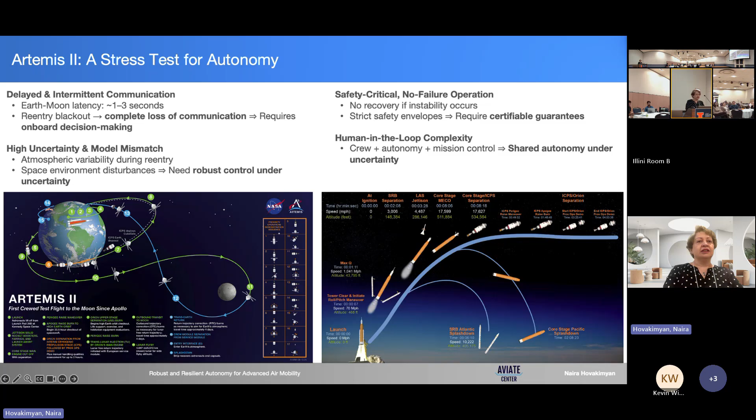The keywords that we've captured here reflect what was emphasized throughout the 10 days: the unforgiving nature of space engineering. Equally unforgiving is commercial aviation and today's advanced air mobility industry, which deals with human lives.

I decided to do a brief historical overview. When I came to this country 28 years ago, the aerospace industry was presented through these big vehicles at Georgia Tech. I came with a PhD in math and had to work on stability of these flight control systems. Everything was big, huge, humongous. As I worked 28 years in this country, everything got kind of miniaturized, small scale, autonomous, human-centric.

These developments were enabled by the data explosion that came with the hardware development of making CPUs and GPUs cheap and available. LLMs and VLAs became a common marketplace. Consumer markets like parcel delivery, emergency response, and agriculture also became part of the problems for the aerospace industry.

Commercial aviation, over 100 years, by enforcing zero tolerance to accidents, has achieved safety and public trust, flying 4.5 billion passengers per year.

The same cannot yet be claimed for the low altitude space, where advanced air mobility developments are happening. Just last year near DC airport, a passenger airplane crashed into a military helicopter - or better to say, the military helicopter crashed into the passenger airplane - causing catastrophic failure and the death of many passengers. So the low altitude space remains largely vulnerable to different uncertainties and unpredictable circumstances.

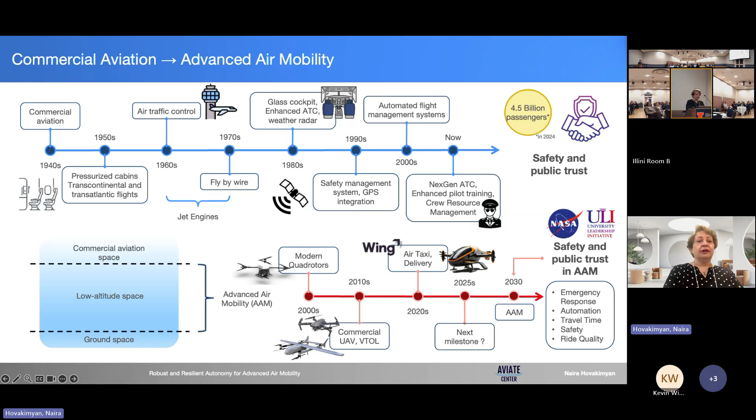The problems that appear here have a lot to do with autonomy, optimization, deconfliction, path planning, mission management, and many others. In the low altitude space, we're thinking about emergency response, healthcare, optimizing travel time, cargo delivery, and many others.

The technology that can tackle this, what we're trying to solve, should deal with scale, complexity, and also safety. For that, we need autonomy with assured safety.

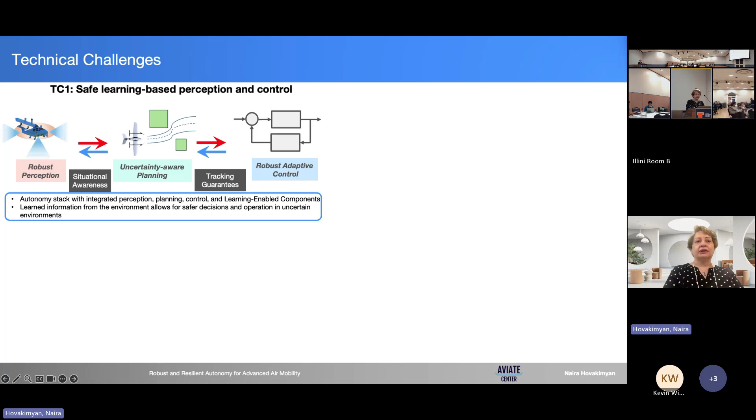The technical challenges formulated through this ULI program are four. The first is safe learning-based perception and control, where we're trying to integrate different learning-enabled components into L1 adaptive control architecture, or other architectures expanded through collaborations, like the simplex architecture we developed with Lui Sha for integration of learning-enabled components.

We have fast data-driven and code-level verification that Mitra is leading. We have runtime fault diagnosis and reachability analysis being led by North Carolina A&T University, which is an R2 university - they were trusted with a major technical challenge. And we have testing, evaluation, and integration toward technology transfer, under which we developed all the flight tests that we had.

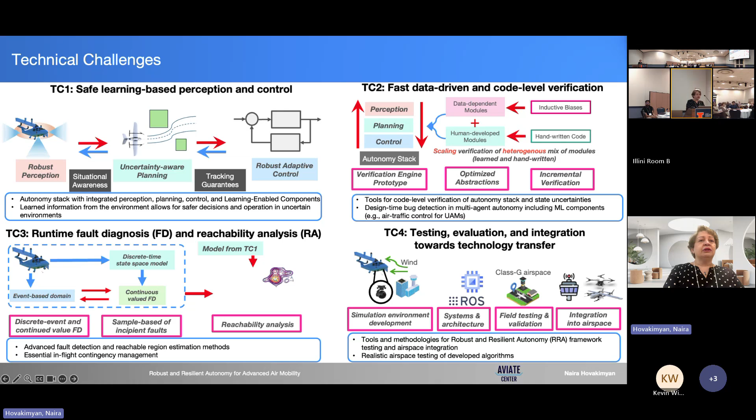This University Leadership Initiative culminated in a major Autonomy Fest flight demonstration at University of Nevada, Reno last year, led by Christos Papachristos, who worked closely with Evangelos Theodorou from Georgia Tech and Sierra Nevada Corporation. Within two days, they demonstrated takeoff and landing on water, and vision-based landing of small UAVs.

They did covariance steering, like obstacle avoidance up in the air, where you see the machine learning-enabled path planning coming from Georgia Tech, flying on the vehicles of University of Nevada, Reno. Christos will give a big overview of this.

Another major culmination of this University Leadership Initiative was the flight test of Lockheed Martin on the Vista platform, at the heart of which is the L1 adaptive controller. This is a historical chart of the L1 adaptive controller that we started to develop in 2004-05.

The objective was to solve the transient performance issues of conventional adaptive controllers, which were sensitive to delays and disturbances and could result in loss of robustness. With the decoupling of the control and estimation loop, the L1 adaptive controller solved the transient problem.

Through a NASA program with the flight test of a subscale commercial jet, Boeing 757 at 5.5%, we commercialized it across a number of industries. We were able to flight test on a Learjet and F-16 at Edwards Air Force Base. Jessica is here - she was our flight test engineer. And finally, Lockheed Martin put it on Vista, claiming TRL-6.

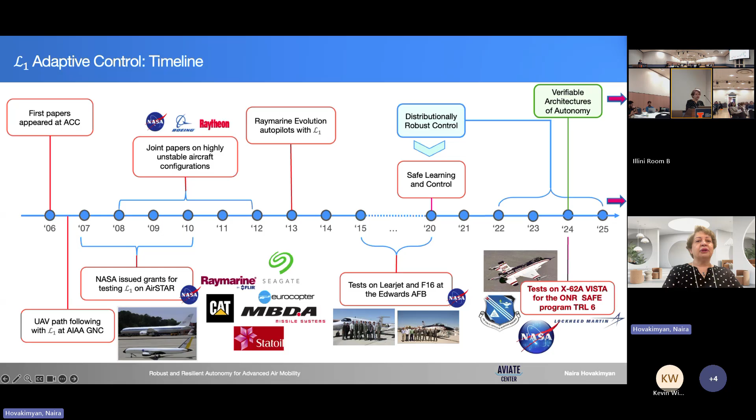The paper summarizes the flight test overview and shows the architecture that was flown.

With that, I would like to give an overview of today's presentations. We will move from TC1, which has safe learning-based perception and control. Lui Sha will present the perception simplex, where we have extensions already to accommodate perception uncertainties in the simplex architecture. They will give a good overview.

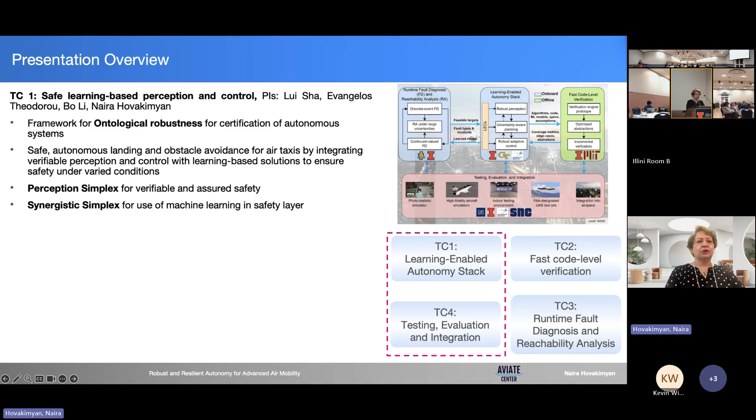We will give an overview of what we call ontological robustness, a language of communication between machine learning enabled components and also the L1 adaptive controller. Why do I emphasize it like a language of communication? Because these vision-based sensors operate with learning enabled components that have stochastic modeling, while the L1 adaptive controller was developed in a deterministic setting with conventional gain and time delay margins. So we made sure that the two can talk to each other rigorously, instead of just saying we tested everything in simulations and it works. I will have one of my postdocs, Aditya Gahlavat, who is not here yet but will soon come, present these developments, because he did most of the mathematical developments.

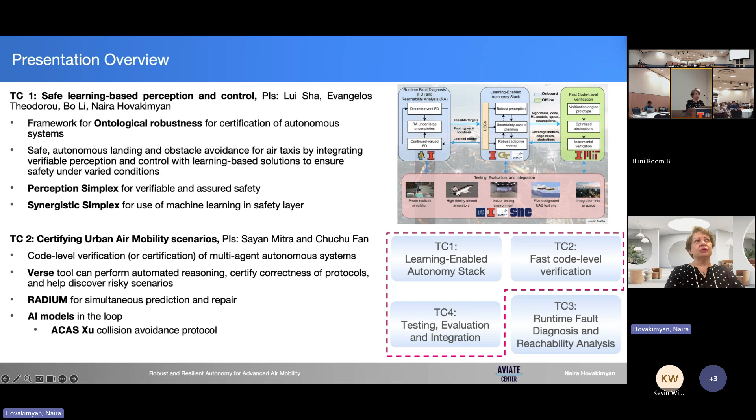We'll have TC2, certifying urban air mobility scenarios. Sayan Mitra will present, and Chuchu is away, but I heard that her postdoc will be here. We will move to TC3 for runtime fault diagnosis and reachability analysis. For in-flight contingency management, we have all the co-PIs here who will take over and do this presentation. And we'll have Christos summarize the flight tests from last year's Autonomy Fest, because that was real-time physical flight testing. The data has been collected and analyzed over the past year, and we can now show nice results. Vasu Salapaka will talk about network logistics and planning problems in airspace management.

As we know, NASA is very keen about the outreach program, the scholarly impact, the number of students who have graduated, and course development. Sayan has developed this wonderful course, ECE 484, Principles of Safe Autonomy, where he uses some of these algorithms he has developed, the verse toolbox. Within the course, students are publishing papers. We are famous scholars, no doubt. We get invited for keynotes, we do different presentations, we get different awards. Here we have summarized some of the new grants that were developed on the basis of this work, and some of the awards our faculty members were able to get through this program.

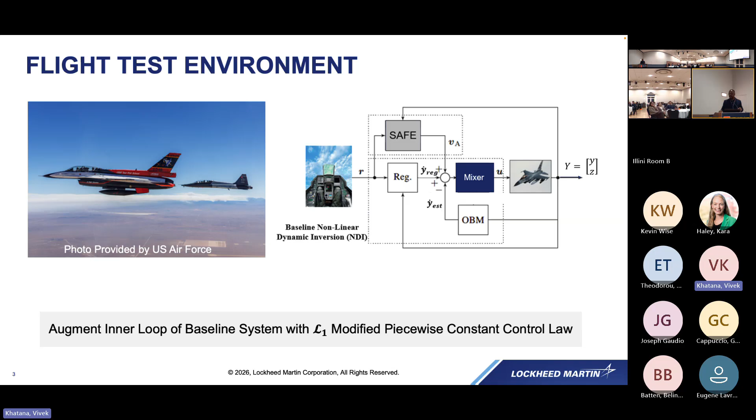L1 allowed them to acquire that much better, and that was the test that got us more money to continue doing more safe controls within Lockheed Martin. The other piece I want to point to is this flight envelope, which doesn't have the scales on it.

The red dot is where we actually tuned the L1 in terms of the filters, we set everything up there. But for this test, we allowed the pilots to fly wherever they wanted. So when we talk about robustness and saving time doing controls, if I can just go tune at one place and then fly at many other places, that is a benefit and a testament to the robustness of the aircraft.

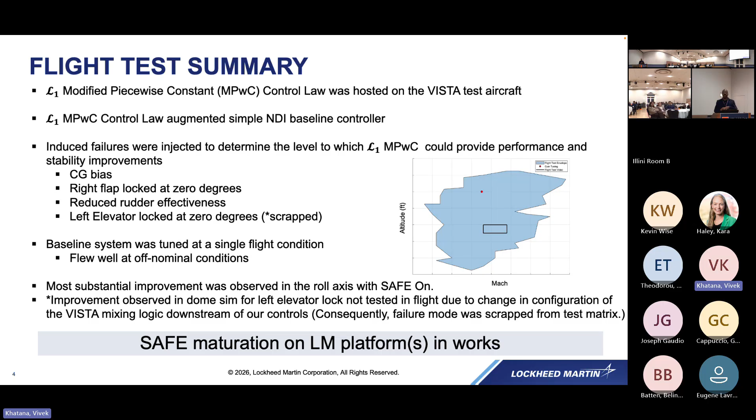I don't have to go through and do an intricate schedule, which is typically what happens - you go to different flight conditions, design your control laws, your gains, and so forth. The box shown there is where the heat-to-guns maneuver in the video actually occurs. You can see the separation between where we tuned and where the flight test for heat-to-guns was actually performed - it's quite a ways away in terms of flight conditions.

So here's some data from it. This is the pitch axis. This was not a pitch axis failure, so as you'd expect, the tracking with L1 off, safe off, compared to safe on, is about the same.

But when you go to the roll axis, as he's trying to execute this heat-to-guns in the bank of turn, the flap being locked introduces a bias in the system that was not corrected. We didn't do anything with the mixer to say, okay, if there's a failure, take actions A, B, C, D. We wanted to test this strictly on the simplest mixer possible, just to determine how much the augmentation would help us out.

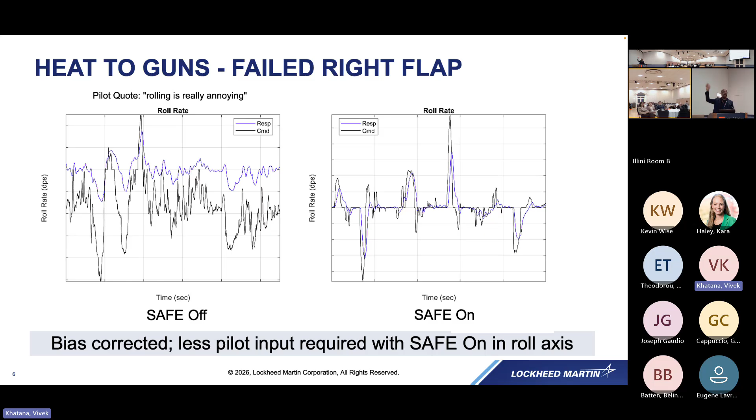Going from safe off to safe on, you can see that certainly, if we were to convert this into a video, which we do in the next slide, the tracking is going to be much better on the right side.

So in closing, we were happy to participate in this program, and grateful that we got results we could show and demonstrate the capabilities of this technology. The idea is to continue forward. One thing of interest to me personally is the reachability analysis we've been working on here.

That would be of interest to get into a system to determine that if I'm at location A, I need to get to location B. Then given other constraints like fuel, winds, et cetera, exactly how close can I get to B? What other points can I get to if B is no longer an option? So when we do reachability analysis, it tells us you can get to this point with this much fuel, et cetera.

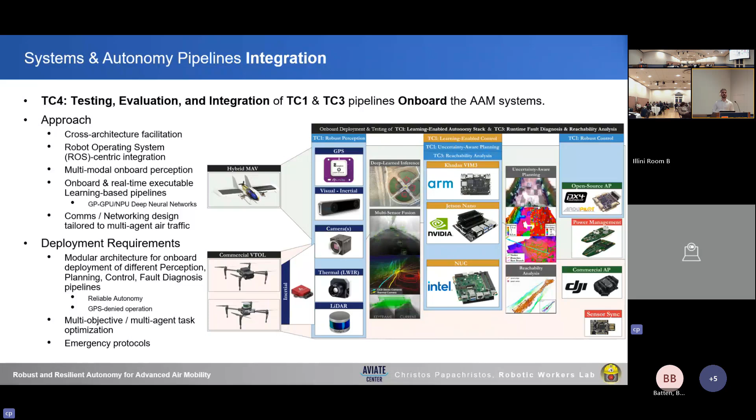And for the deployability of the learning-enabled components, we also needed to approach things in a way that would allow us to physically deploy those onboard even smaller aircraft for real-time verification of the capabilities we were developing across this ULI. One example of how we went about deployability of those learning-enabled components is visualized here, where we considered the additional aspect of how we can ensure systematic repeat back-to-back testing of emergency response situations and how they are handled onboard a small aircraft of this scale.

What you see here is the Gannet VTOL, which is essentially a new generation of system, we call it that. It's perpetually deployable in the sense that it's a system that can self-sustain out in the wild. It can go out, figure out where to land on its own in environments without any kind of supporting infrastructure, and then self-sustain through solar harvesting, self-hibernation, and battery-powered power state management over prolonged periods of time until it becomes necessary for it to respond to a local event that it can sense on its own proprietary sensing, and then take off and take on a required mission in order to perhaps take care of a local emergency situation.

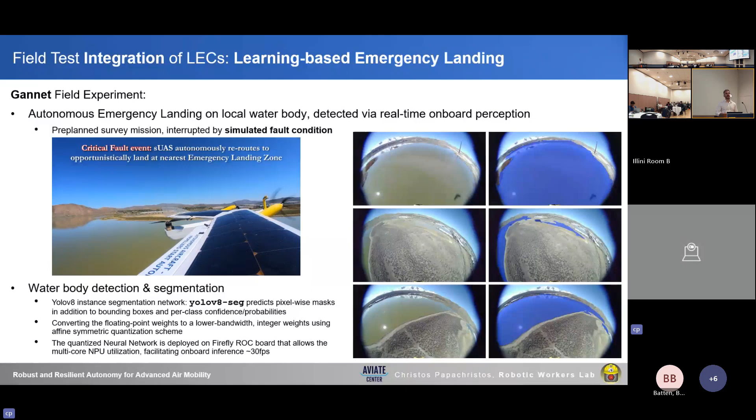This is in line with the approach of low altitude flight expected for urban air mobility platforms, where whenever they are flying over natural, unstructured environments, they may encounter some kind of emergency event, and they have to respond in real time by taking an onboard decision given the mission parameters and knowledge, for example, of how far away an airstrip might be versus an opportunistic landing situation based on the local environment and its terrain landmarks.

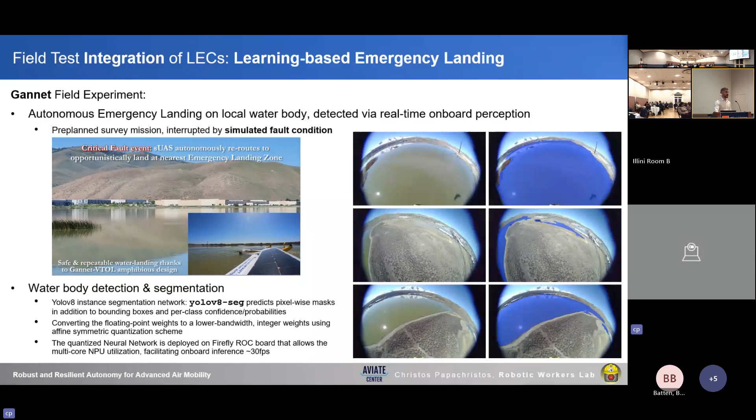The cross-architectural approach we followed allowed us to also deploy this kind of algorithms on larger aircraft and transition this technology to our industry partner, Sierra Nevada Corporation, who had recently acquired Volansi, a company that develops mid-scale hybrid VTOL aircraft. This allowed us to leverage the increased payload offered by such a platform, where we could deploy more powerful Ampere GPU frameworks, with payloads involving multiple cameras operating onboard the aircraft at all times.

Now, for the purpose of this kind of integration, it's not just about giving capabilities to industry, but it also feeds back to us with data and realistic world situations with other aircraft, where we can collect an understanding of how these behave across different scenarios.

The scenario at hand, which was field tested and demonstrated during the ULI Autonomy Fest, had to do with detection of terrain landmarks, which would serve as safe landing locations, without restricting ourselves to the computational capabilities of smaller neural processing units, which require techniques like quantization of network weights in order to be deployable. In such a system, we didn't have to lose accuracy, and we were able to deploy much more powerful deep learning strategies.

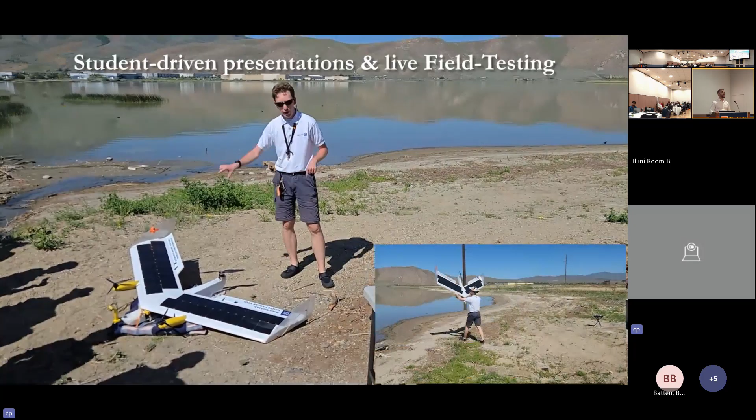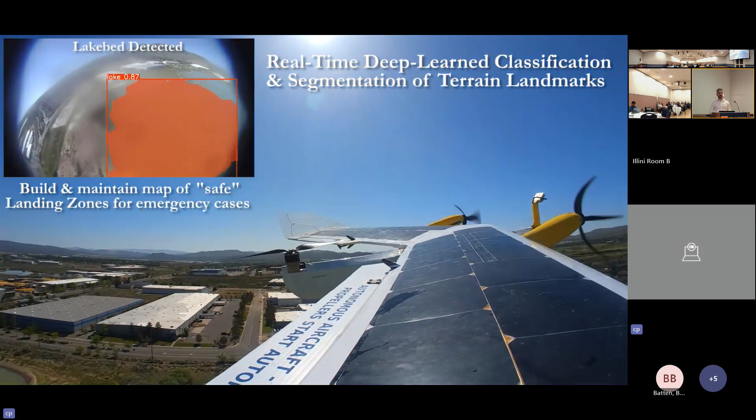This whole set of capabilities culminated essentially in a combined testing of everything across the ULI Autonomy Fest event, where students got the opportunity to not just present PowerPoint presentations of their work, but present their actual hands-on work in real life, its applicability in emergency response and emergency handling scenarios. It also happened in front of a real live audience, including academic partners, research lab leads, and industry partners, for example Lockheed Martin, Google Wing, Sierra Nevada Corporation, etc. So it was a combined event where students and industry, academic, and research leads came together and were given the opportunity to witness the products of this work and how it plays out in real life scenarios.

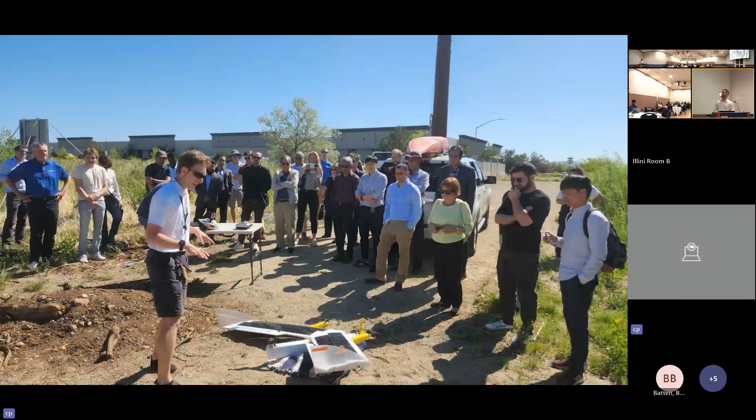What you see here is the first sequence of this test, utilizing this autonomous amphibious aircraft to take decisions on where to land based on just detecting the fact that there is a lake in the local environment, and being able to tell that this is an appropriate landing location to minimize any kind of catastrophic risks. Kind of in line with the virtual Captain Sully, which was interestingly part of our proposal when this ULI was proposed. It fit very well within the notion of this concept.

Now the second sequence of tests pertains to the covariance steering algorithm and its deployment on limited computational capabilities, but still capable of performing the execution of learning-enabled components on board, which in this particular case is the Minihawk platform.

What you see here is the students leading the test. It was a combined team of undergraduates all the way to PhD level, with undergraduates, graduates, and PhD level students that led all these tests in front of the audiences.

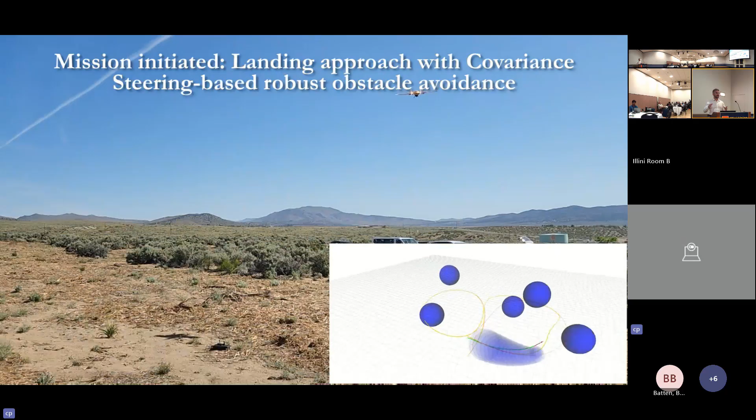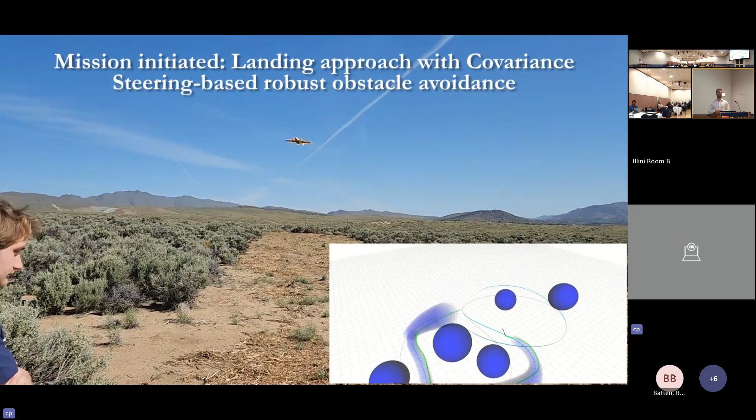This test of course doesn't involve real obstacles and their detection in real time, but it involves the execution of a pre-planned final descent maneuver and the virtual discovery of obstacles, which means there has to be an adaptation of the trajectory on board. This is in order to guarantee safe landing; the covariance steering gives those guarantees such that the landing happens with guaranteed avoidance of the virtual obstacles that are being virtually discovered again during the approach maneuver.

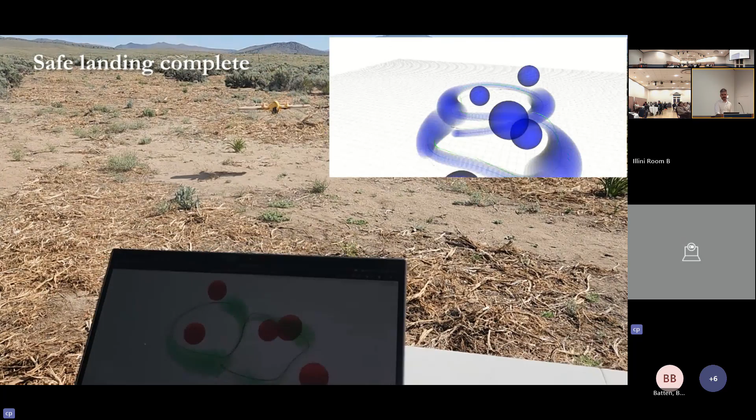This should also be indicative of the scale of this particular aircraft, that despite all the computational capabilities and all the field potential that it has, it's a very easy to repeat platform in terms of its physical implementation.

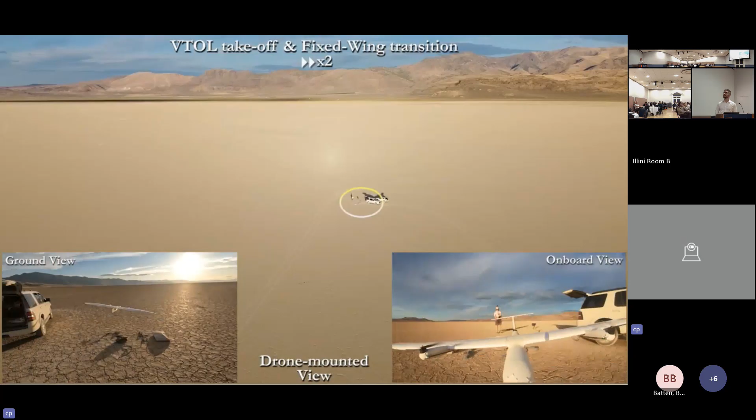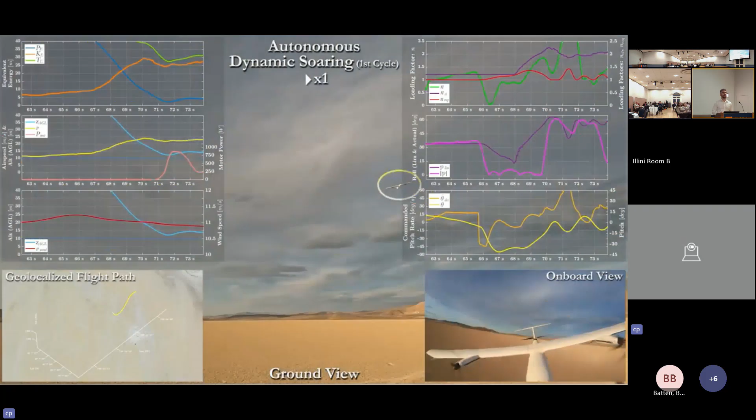The last thing to mention, this is more recent work. This is not something we demonstrated at the ULI Autonomy Fest, but it's also indicative of further work we've been doing with very different looking field testing environments. This is essentially a new aircraft we've built that we call the Albatross. It's capable of performing more dynamic motions, and still capable of all the other capabilities I mentioned before, with amphibious capabilities plus onboard perception and autonomy.

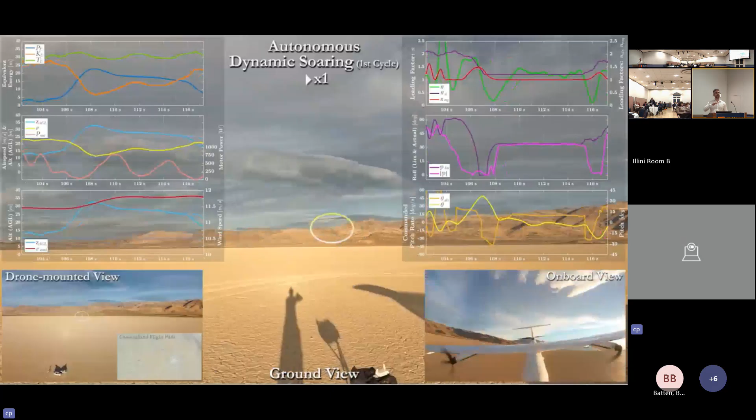Here what we are developing is some early testing of dynamic soaring maneuvering, so more agile maneuvering, tested over a desert dry lake bed, which serves as an environment where we can initially go to test this kind of more dynamic motion before we deploy it on board, and close to surface skimming maneuvers that are required in order to replicate the same type of dynamic soaring behavior that you see with albatross birds, for example.

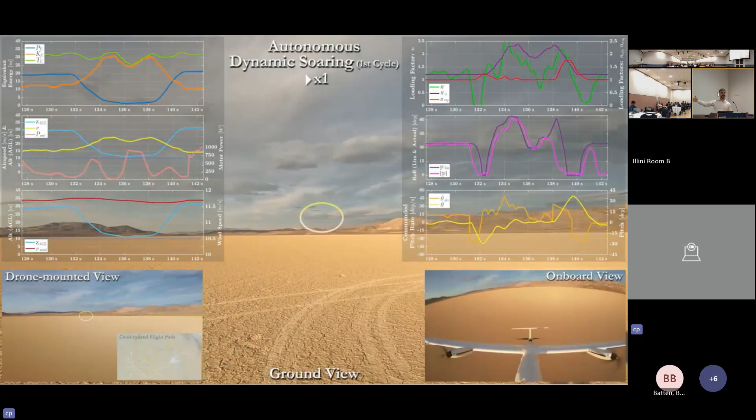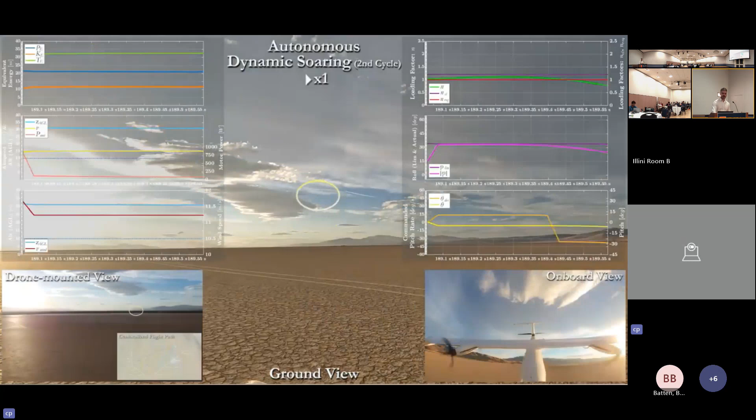This is just an indication of even further, not just testing, but also UAS field demonstration environments that we have available at the region of UNR. That's it from my side. Thank you for the attention, and I'd love to take any questions.

Everybody ready for a coffee break?

So Chris, the nice thing is, when I was out there, was it less than a year ago? We discussed improving capabilities, onboard capabilities for some of the platforms, and it looks like you guys have taken that to heart, and you certainly are doing that. Can you chat a little bit more about this? Because you talked about the bigger UAV, that's Sierra Nevada or whatever, but for some of the smaller stuff you guys have in your lab, can you expand a little on the capabilities, maybe better computational capabilities that you now have, or what your plans are?

Yes. So for the smaller platforms, we are now considering the integration of Jetson NVIDIA platforms on board instead of neural processing units.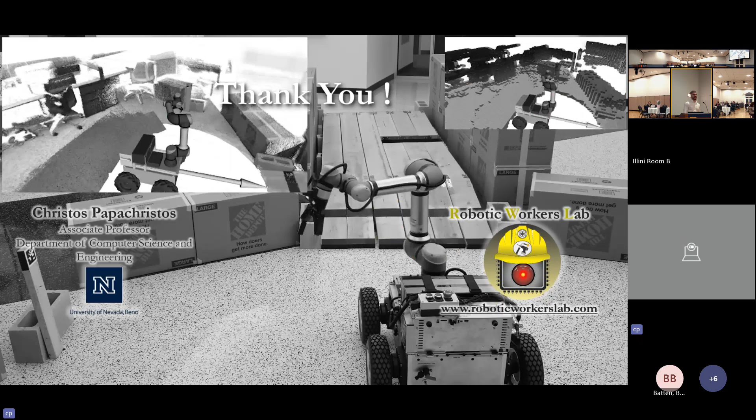We have seen that they offer significant, as far as learning goes, significant increase in the capabilities of what we can demonstrate and deploy. This is also in line with the Albatross platform, which can support bigger payloads.

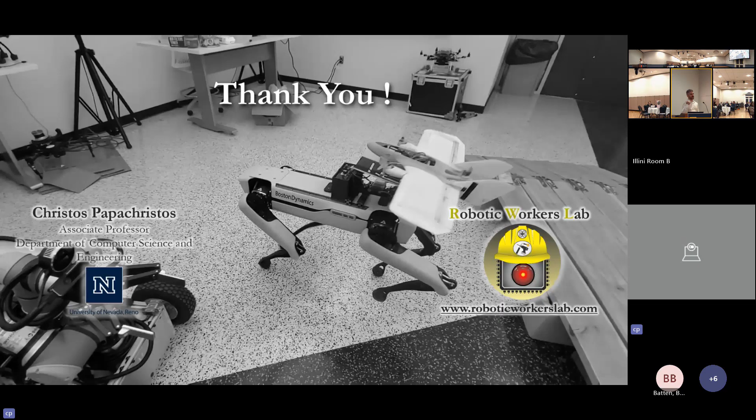We believe it's going to be required in order to handle situations where you need more bandwidth in detection to respond faster, especially with those agile maneuvers we are demonstrating and want to accomplish with dynamic soaring, close to more dynamic environments, like flying very close to waves, to surfaces of not just lakes, but we plan to bring it over to an oceanic environment and fly closer to waves. This has bearings and relevance to doing more dynamic motions in environments with other types of dynamics, like urban environments.

Just to summarize a little bit what capabilities you guys are developing: at the end of the day, the same kind of stack has to be demonstrated before it becomes something that people adopt in industry. So the capabilities you're developing is precisely that - you're trying to get to where you can actually demonstrate an entire autonomy stack in those environments.

Thank you. Our approach is that we don't stop until we get a field test out of everything that we've developed in simulation or any other approach that we send out for research papers. We don't stop until we have a field test that replicates the whole behavior in real life, in a repeatable fashion.

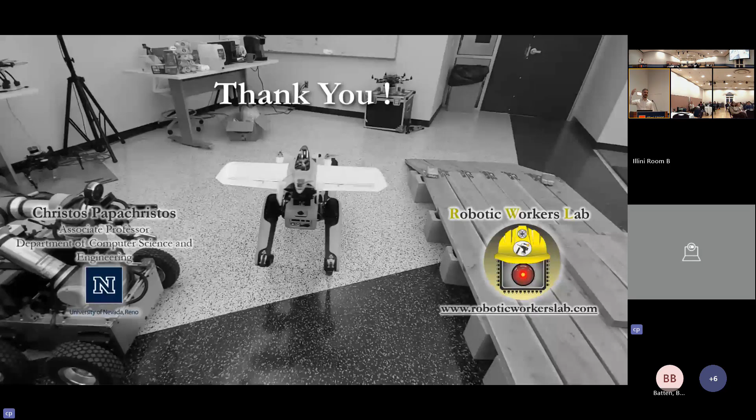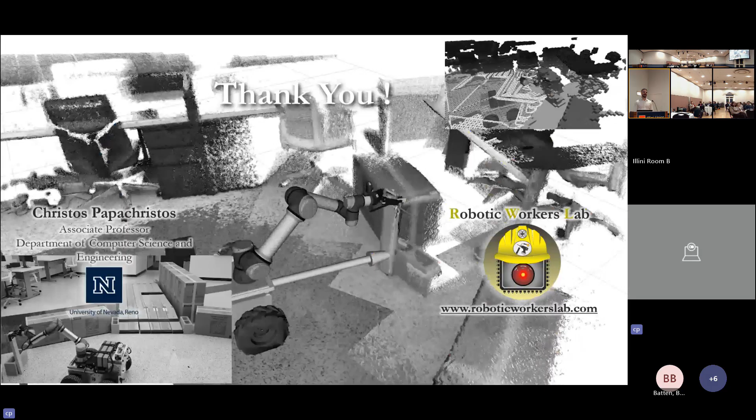We've thought of several ways we can approach this, because the whole thing needs to be repeatable. We don't want to crash all the time, so we are developing scenarios where we have vehicles flying within the airspace of an already deployed aircraft. We have several approaches for that, but again, this is pertinent on having more time under this ULI umbrella to demonstrate that with real life flying options. Probably not UAVs, like blimps, something equivalent to that initially, but yeah, we do plan to do that.

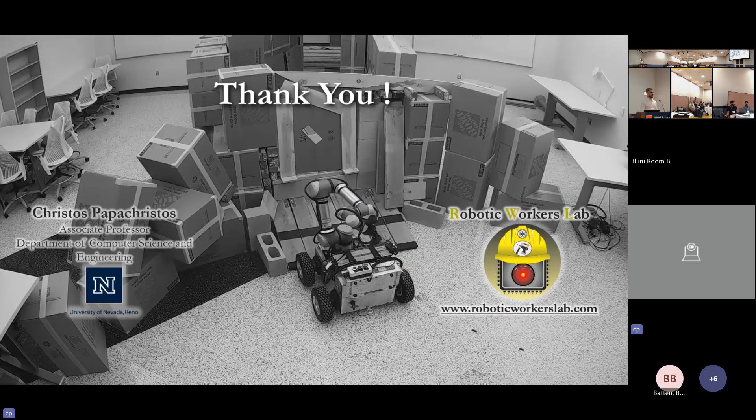Hey, great work. I'll just offer that NASA is very interested in perception and collision avoidance. T-Cubed is working to put out - we've recently released the baseball avoidance multi-rotor challenge and software, and your stuff seems very close to that. T-Cubed is trying to formulate and put out a challenge in the university community. Some schools have undergrad research projects doing it, but I'd suggest getting some of this on a quad rotor and shooting wiffle balls at them to demonstrate that capability. We're in the planning stages of coming out with opportunities to demonstrate that. So if you want your lab to be famous at an MLB game, there you go.

Thank you for making us aware. Stay tuned, we'll talk at the end.

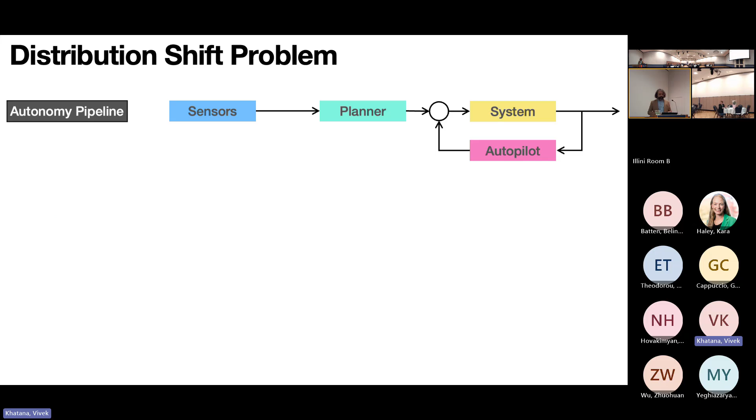So with the language of distribution, we are going to pose when uncertainties in the system come in as a problem of distribution shift. Uncertainties in the system, we always have some sort of epistemic uncertainty, model errors, simple. And then we have some unlearnable but statistically known disturbances, like wind disturbance and truly random stuff. Combined, they make the system behave like we do not expect to see. Again, a very standard problem, but we can cast it as a distribution shift problem.

Now, to be robust to such things, if you're doing parametric estimation, you can run more time in the wind tunnel, get more data. You can do that if your systems are cheap to evaluate and you do not mind if they fail from time to time. But when we come into high consequence systems like aviation and interplanetary exploration, we don't have that luxury to bash the system into the wall repeatedly, get the failure data points, and then be happy that I have seen all possible failure modes, and therefore I'm robust.

The challenge here is we have to be robust without having to see that. So it's like a generalization problem, but from a controls perspective. What we want to do is look at the systems that are generating the data, because from a controls perspective, that's what we do: we manipulate the behavior of the system in certain ways.

Since my data is a representation of what my system is doing, by controlling my system, I should be able to get some notion of where my system distribution lies when I run it. So I'm changing the system that is leading to the distribution. I'm not touching the distribution, purely doing system theoretic analysis and control.

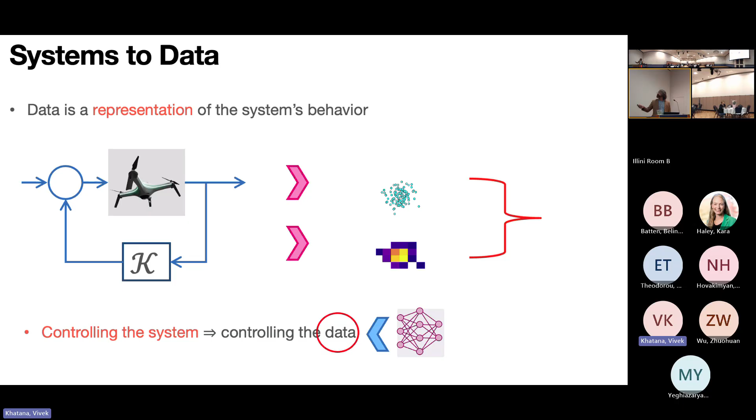If we can do this, the good thing is that the data is where all my learned components are guaranteed to operate in some way. This is what they say. So if I can make sure that my data is around where they were learned, I will start to get some notion that I can use them without asking the learned components to do anything in addition to what they already know. So for that, we devised this control strategy.

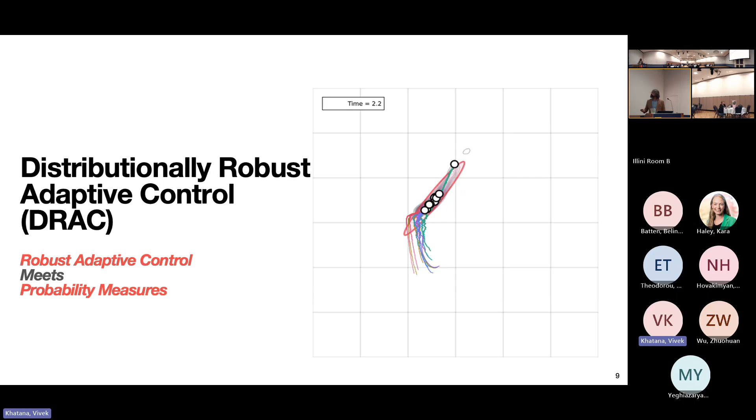I won't go into the theory, just the results and very high level points. So we did the L1 adaptive control, but for certificates in the sense of distributions, probability measures. We were able to consider a much more general class of dynamics, which are stochastic differential equations. These are a pure generalization of ordinary differential equations, so if you were to turn off certain things, you get your nice ODEs back. In that way, this is a pure generalization.

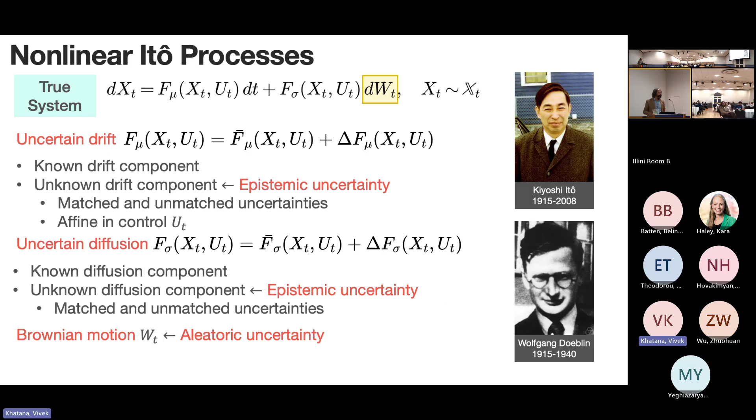Like the uncertain systems, we have uncertainty in both drift and diffusion, where the uncertainties come in, and these are epistemic. We also have this addition of Brownian motion, which represents natural randomness that your system might encounter that you'll never be able to model, regardless of how much data you get. It's like a coin toss: you can see how many times you get heads or tails, but the next time you will never be able to predict with 100% probability. But you know the distribution of it, it's 50-50 uniform.

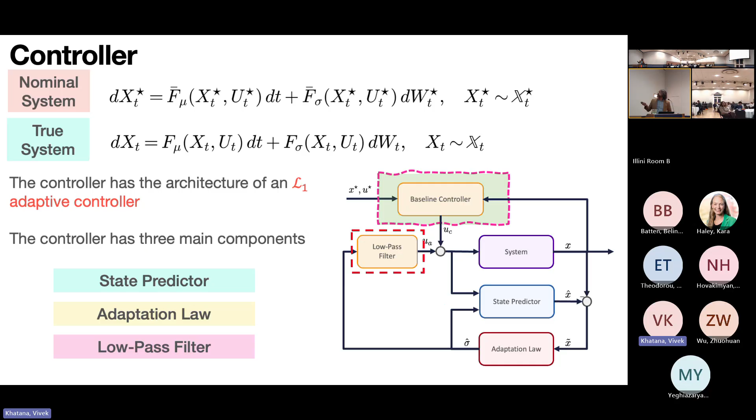So we take the standard L1 architecture and just apply a different analysis to that. L1, as some of you know, has our standard parts, and we maintain our controller identical. The controller implementation is identical to how it has always been, so it maintains the certifiability on whatever system it was certified on. The stochasticity is just inherited because it's controlling a system that has these features.

A very important property is that our implementation is standard, it's in the feedback space. So you operate like a standard controller using state or output feedback. That's all you're getting, but the guarantees we are getting are in this distribution space, which could be if you were to run your system 1,000,000 times, giving you a distributional behavior of your system.

Now we want to get those guarantees without having to run the system millions of times, because when you're running the controller, we only get state feedback or output feedback. We're not getting multiple data points. So keeping our feedback space separate from our distribution space is a very novel dichotomy between these two.

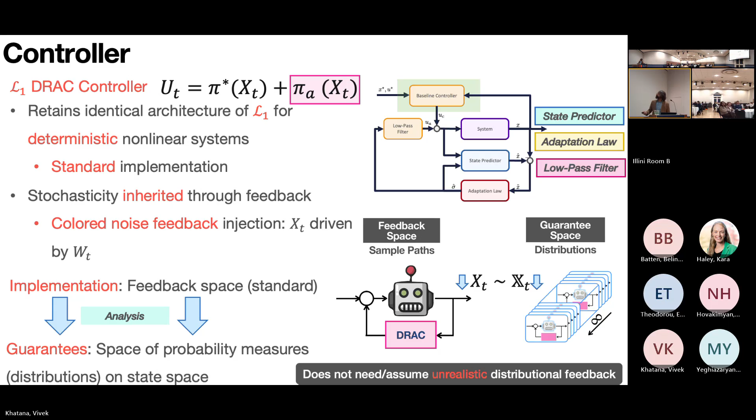Very quick going over the, what's the time? 10 minutes? Okay, perfect. So just quickly, the guarantees, and again, just to show that we retain our uniform guarantees, which we will then use later.

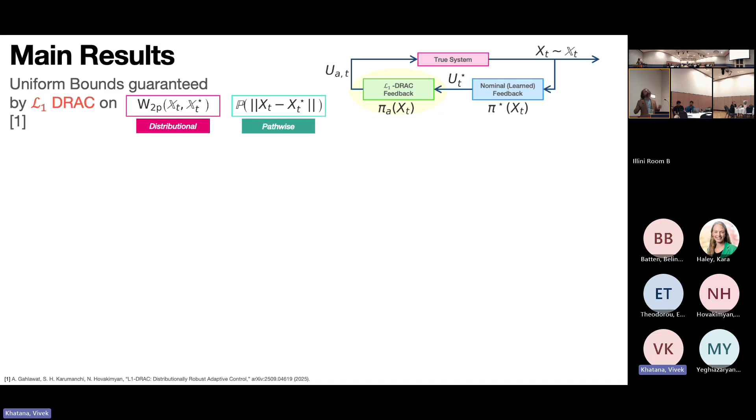We get uniform guarantees in the sense of the Wasserstein metric, which is a metric between distributions and has nice properties that I will discuss. We also get these high probability bounds. So if instead of wanting distributional certificates, you wanted to see will my system be safe with a high probability, then you use these pathwise results. And we'll use Wasserstein when we want to introduce machine learning components.

The good thing is they have a one-to-one bijective mapping to the deterministic scenario. And there are some changes that happen where even if you have no epistemic uncertainties, your systems will not lie on top of each other. This is because of the noise in the system, the Brownian motion. The heads and tails will always be different, even though they're the same distribution.

And for the generalization part, if I were to turn off the stochasticities, I get back my ODE and my results become again back into Euclidean space. So it's a complete one-to-one generalization.

And for the high probability results, we have a very good property, which is these polylogs. So the idea is that suppose you want a system to be certified for a very high degree of safety. Suppose you accept a failure probability of 10 to the power minus 10. Given that, your controller will say, okay, as long as you're in this set, I can ensure that you will only leave the set with a probability of 10 to the power minus 10. That's a very high probability, high consequence scenario.

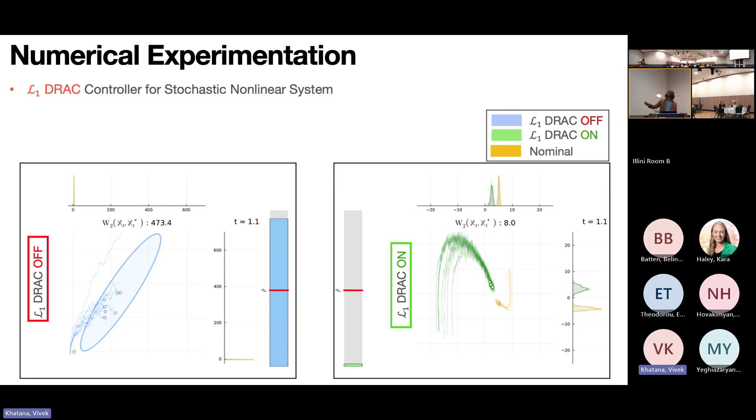Now, this system, the blue one here is without our L1. It is not unstable in the sense that we think it is diverging in its behavior, it's just expanding out; the variance is exploding. And on the right-hand side, we see the green one with the L1 comes and tries to sit on top of the distribution that we need.

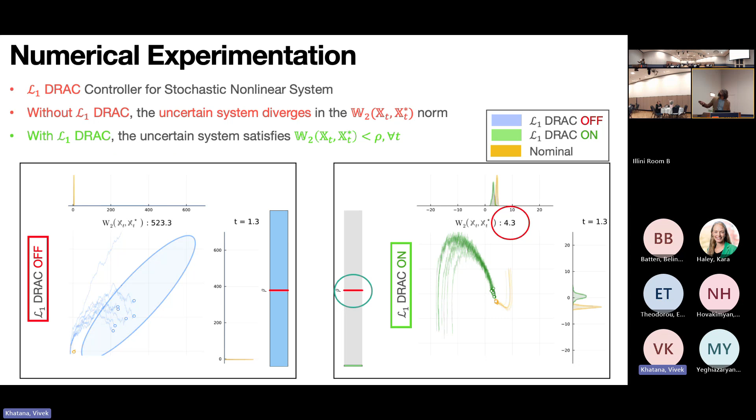And I will talk about this, the Wasserstein importance in the distribution shape matching, which will come when we do covariance steering.

So we come back to our autonomy pipeline with the questions of what should I communicate, or what should the components communicate, and in what language, so that they can talk to each other without having to constrain themselves to a certain operational limit. So what our approach is coming along is that for our low level, we use our controllers, obviously. That enables that the content that I communicate, at least from the planner, from my low level control to the planner, is my planning bound, this guaranteed uniform bound. And of course, the language is in the space of distributions.

Okay, so the planner knows that whatever it asks the system to do, the uncertain system will remain around it in the sense of distributions, which then is such a general concept that we'll be able to bring in many things like perception and machine learned components.

So we do this for covariance steering, which our previous speaker had talked about, but this is more on a development level. So like any optimal control, when we have our system's difference, the problem happens when our system is not like what we expect, which is very standard, except here we're talking in the space of distribution.

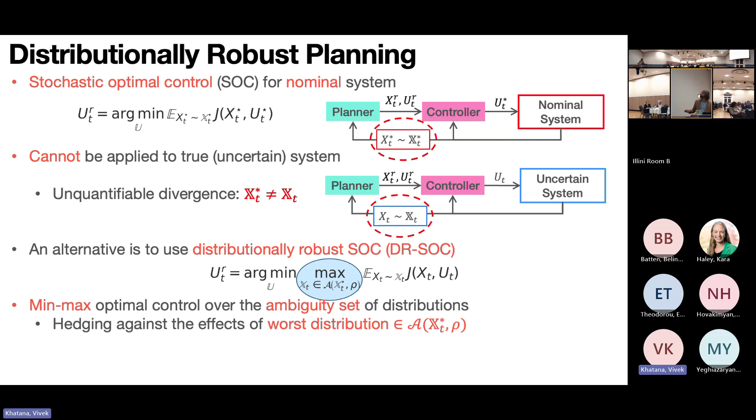So what we can do is, of course, make the problem robust. We minimize the worst case effect. Now here it is a minimized worst case of a set of distributions that a controller is guaranteeing. Getting that is a challenge, but of course we have a controller, we can do that.

So to get this ambiguity set, we use our L1 controllers. But usually, if you don't have such a strategy, you have to rely on certain assumptions that are not realizable. First is, of course, that you have seen the scenario that you're trying to be robust against, which is, again, assuming you have all the experience in the world, so you'll make smart decisions. We don't want that. It is limited. We have limited experience.

And further, properties of the systems, like known bounds. How does the system behave a priori? Is it bounded in certain moments or not? These things become too restrictive. And if we want to maintain usability, we don't want to add anything at all.

So we do this for covariance steering. And this is our guarantee that a controller is providing, which tells the planner that, planner, whatever you're doing at x, the actual system will remain in this set around, with a radius rho. So the planner is like, okay, I'm going to plan for my x, but I'm going to ensure my constraints are satisfied for the worst case in this ball. And this way, your system operates with a guaranteed safety margin.

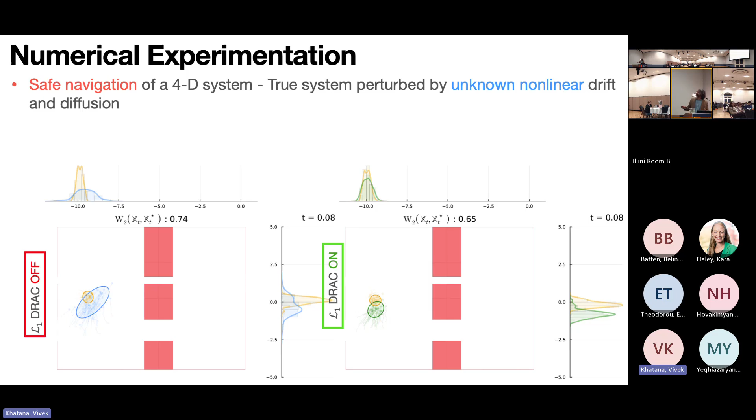So we did this for covariance steering. This was done by my postdoc Vivek here. So on the left-hand side, you can see without L1, yellow is our covariance steering nominal, blue is our actual system. So because the planner does not know, it sends the reference commands to the downstream. The system tries to follow it, but you can see many paths collide into it.

And the nominal is doing something interesting because it is covariance steering. It is not just squishing down the variance, it is shaping the variance. So to go through that narrow slit, you will see that the yellow is not just uniformly squishing into a circle, but is squishing into an ellipsoid so that it can slide through.

Now on the right-hand side, when we put our L1, the bounds are conservative, but the planner knows that, okay, as long as I keep that margin, my system will remain safe, the actual system. So now the planner takes a longer route, but the system follows it quite faithfully.

And the squishing of the covariance comes into effect because we are tracking in the sense of Wasserstein, which is not just talking about where the distributions are, but what their shapes are also. So these are true metrics in that sense. So you can see there, our yellow, this actual system, is Gaussian, the nominal system. My true system, green, is not Gaussian, but my controller takes those distributions and tries to match the shapes as much as it can. So it is matching both in location and shape.

So when you're using a controller like covariance steering, which is squishing and shaping your covariance to move through the obstacle field, the controller will also try to do that, and not just compute the worst case as in, say, total variation distance.

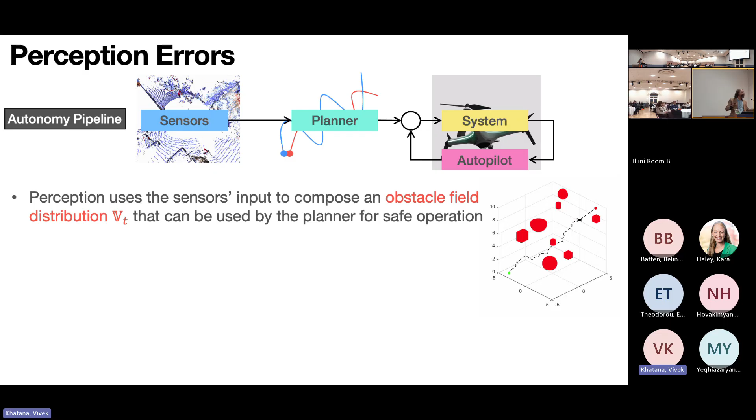In this work, we divided into: what was the data that you had? You had some finite amount of data. How does that affect your performance and what guarantees you can get? So if you trained your environment model on 10 sample points versus a million, give me a bound based on the number you have.

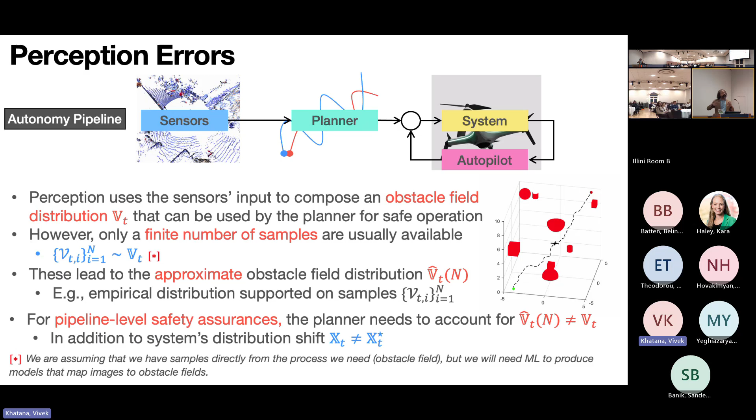We assumed finite samples for this, using which we developed an approximation. Our environment is not exactly what we approximate because we only have finite samples, we've not seen everything. But for our environment uncertainty, we are able to use certain bounds that exist with the Wasserstein concentration, which say that with the number of samples you have, you're guaranteed to remain in a set around the actual thing with certain probability.

That comes in, in general, in the sense of ambiguity sets of distributions. We already have sets of distributions on a low level controller. So now we can combine them as a direct Cartesian product to get an overall ambiguity from both my upstream perception and my downstream controller.

The planner, if it can account for both, which it should because it only needs an ambiguity set, we just have a larger ambiguity set and we can be robust now both to perception errors and low level control errors. So we took our original Wasserstein set, added my downstream set which is what L1 is providing, and then took the Cartesian product with my environment's finite sample based uncertainty in my perception. Then we just sent that combined ambiguity set to my optimal controller problem.

So it's an extension of what we did for covariance steering, and then we were able to get these results. Here, my yellow is my nominal, which is uncertainty free everywhere. My green is with my environment and L1 tackling the uncertainty. And the red is just running in receding horizon, it tries to do its best, but it does not have the knowledge of my ambiguity sets, so it's doing the best it can.

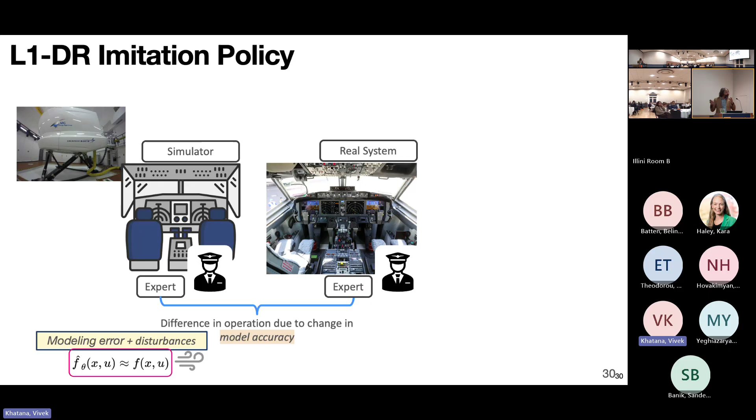A couple of works we already had using machine learned components directly with adaptive control: this was done with Sandeep here for our last SciTech, which was imitation learning, where we were discussing that when you have a simulation to real gap, sim-to-real gap, that is our epistemic uncertainty. Sure, the controller can take care of what we have, but when you're learning a controller that is copying from an expert, you have another source of error, which is this policy shift. My learned controller was not as good as my expert, so that will cause a distribution shift.

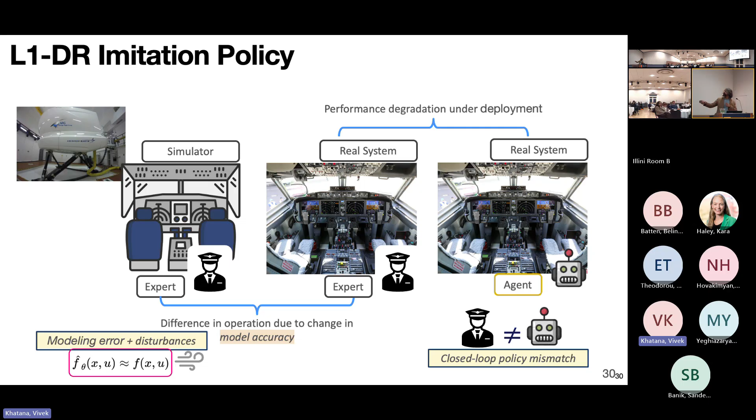So we did this dual part where we used an approach that is robust to policy shift, work done by Nik Matni at UPenn, and then we applied L1. So in this dual approach, we could do imitation learning on fully uncertain systems, addressing the two sources of uncertainty. These are preliminary results, and right now we're working on extending them to more serious systems with the theoretical muscle behind it.

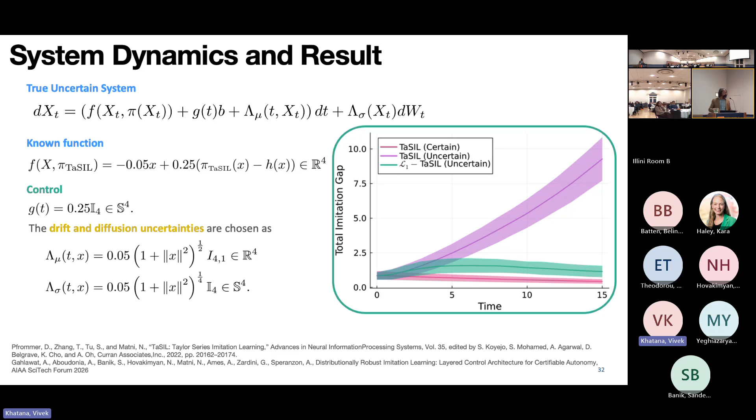And finally, this was at 2024 ICLR when we robustified model-based RL without touching the model-based RL. In the sense that any learning RL, it's not learning a model, it's learning a representation that it thinks gives you the best output. So just using that as a model, we took a state-of-the-art algorithm, and we were able to show that having an adaptive controller in the loop, used smartly without changing the upstream, that was a condition: do not change the upstream. So whatever you train, just slap this on and it should work.

And going forward, talking about the framework that we are interested in, following from our first speaker, we are keeping this safety and learning decoupled for performance. So the online part is where the safety is happening. It is using what we already have, so you have the models that you had, you design your controller with guarantees, and that is going to give you a guaranteed performance of some constant. You decide if it's good enough or not. The learning happens on the side, where you may collect data, you may learn, you check if it's good enough, and then incorporate it.

However, we do not want this learning to be happening at the real-time control loop frequency, because even if you have the compute resources, if you have a bigger vehicle that has compute resources, you may not have the data. Your mission might not take you to places where you need the data to learn. So again, it's the problem of needing a good algorithm to train, and needing good data for it. And from a safety perspective, we do not want to have this dependency that you need to learn fast, only then you'll be safe. So we decouple this: our safety remains persistent, but our performance based on learning is opportunistic. Whenever you can do better, do it. I'd rather be conservative and safe rather than 50% really high performing but 50% just falling out of the sky. So we want to keep that baseline guarantee.

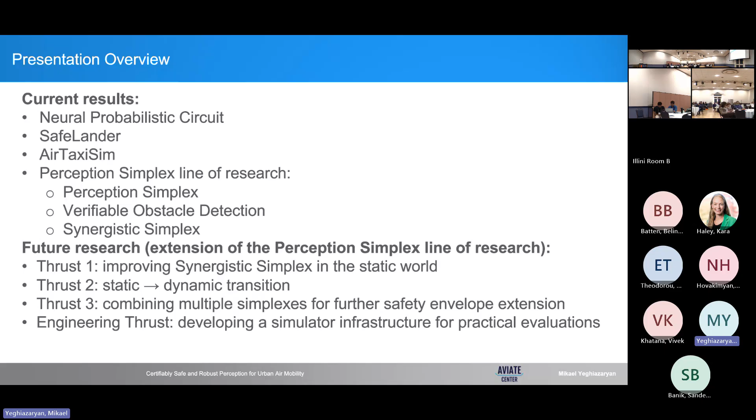I'll continue from here and briefly outline the structure of the remainder of the presentation. I'll first summarize our completed work, focusing on perception simplex at the end, and then discuss ongoing and future directions that build on it, which have mainly stemmed from this ULI project.

I'll start with the neural probabilistic circuits, led by my colleague Simon Yu. This work aims to improve neural network reliability by decomposing predictions into meaningful components. For example, instead of directly detecting a heliport landing area, NPC detects its defining parts: the circle, the letter H, and the white and yellow color patterns.

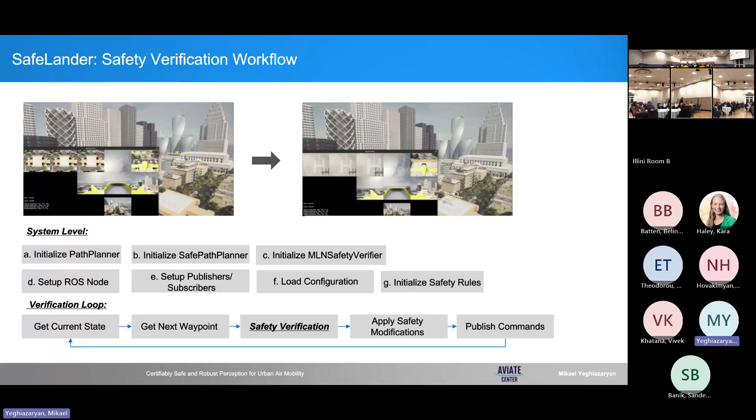Under the ULI program, our team, led by Professor Bo Li, also developed SafeLander, an architecture that leverages state-of-the-art AI models to make the landing process of autonomous VTOLs, such as Guam, more robust, helping avoid collisions and other unsafe scenarios. To enable fast and safe testing of ideas, we developed a high-fidelity realistic simulation framework based on the Carla Autonomous Vehicle Simulator.

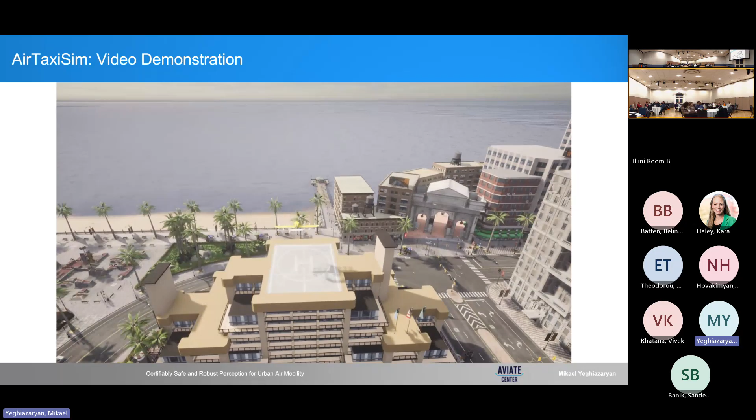Our framework, called Air Taxi Sim, supports vehicles such as Guam and Minihawk, developed in collaboration with other ULI teams from UNR, MIT, and more. Here we have an example landing scenario simulated in Air Taxi Sim. I'd like to mention that it is already used by several teams across universities, which is quite good.

Now I'll move on to the line of work on perception simplex that Professor Sha has already mentioned. This work was originally led by my former colleague, Ayoosh Bansal, under Professor Sha. From now on, I'll occasionally call perception simplex PS for short. Put simply, any autonomous vehicle equipped with PS can avoid collisions caused by ML obstacle detection failures, as long as the stated assumptions hold.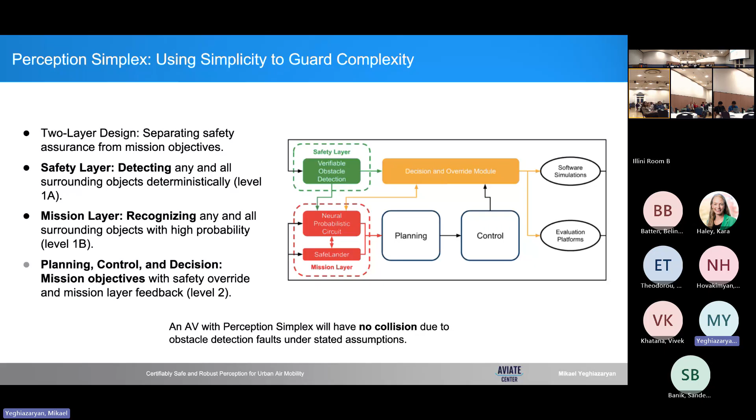The assumptions are outlined in the paper, and they are not super restrictive—they're quite practical. Perception simplex works as a runtime assurance algorithm. The safety layer, based on LiDAR, monitors and can override the actions suggested by the machine learning perception system.

To enable the guarantees provided by PS, the system relies on a key algorithm developed within the ULI project called verifiable obstacle detection. It uses classical geometric methods with LiDAR data to detect obstacles. The key idea is that when the angle between two points from consecutive LiDAR rays exceeds a threshold, the latter point is classified as part of an obstacle. These points are then grouped into obstacle detections using simple, explainable 3D clustering methods. In validation experiments, we observed that practically no obstacle was missing.

Let's now move on to the current work, motivated by the fact that perception simplex can be overly conservative, especially at high speeds, which can limit performance. After all, the safest vehicle is a stationary one, but that's not practically useful. To address this, we developed synergistic simplex, or SS for short, an extension of perception simplex. The key idea is to carefully break the traditional rule of not using ML information in the safety layer. By incorporating selected ML functionalities into the safety layer, we improve performance without compromising safety.

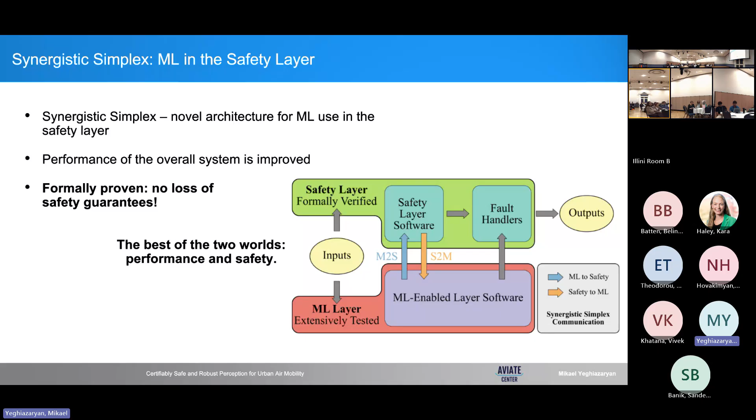This direction continues to draw interest from former team members, which I'd like to briefly mention. Ayush, for example, who originally worked on perception simplex, remains a valued point of contact for continuity of knowledge through occasional discussions.

Right. Let's now move on to the future research, which primarily extends the synergistic simplex, which we just discussed. Our future research has 3 research thrusts and 1 engineering thrust.

Thrust 1 improves synergistic simplex for static obstacles. This is an assumption we have so far, that obstacles are static. In thrust 2, we remove the static obstacle assumption and study when safety guarantees can still be provided in this dynamic setting. In thrust 3, we look at extending the safety envelope in dynamic settings even more. And finally, the engineering thrust supports this work through large-scale simulations, building on our simulator development experience from ULI. I'll talk about it in more detail later.

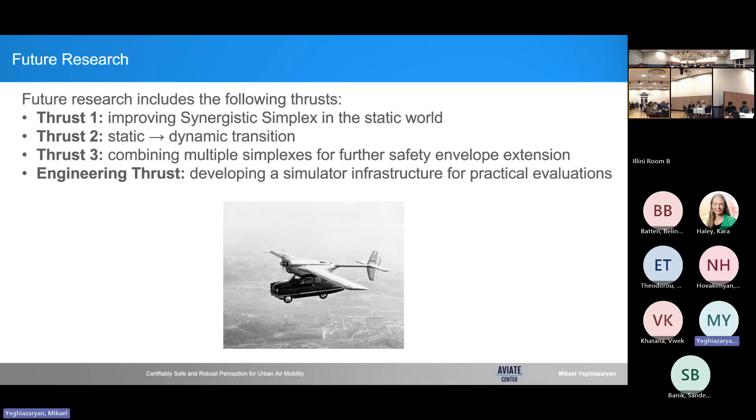I should also note that the synergistic simplex applies to almost any cyber-physical system, including both ground and aerial vehicles. Most examples here use ground vehicles simply because they're easier to explain and have more mature regulatory frameworks. I note again, this is more like future research.

So here is an overview of synergistic simplex in its current form. Let's zoom in on the core contribution of this work, the ML to safety layer link. In thrust 1, we aim to introduce a coherent set of filters to screen out clearly incorrect ML outputs. Using these outputs does not weaken the formal safety guarantees as shown in the paper, but filtering them out is still beneficial, and that is our goal here.

One possible filtering approach, for example, is to use physical counter evidence to validate ML outputs. Let's say the ML model detects a green traffic light, but we do not observe any intensity in the green spectrum, so we can discard that prediction. We plan to implement this as a series of Swiss cheese-like filters, allowing only reliable ML information to pass through. The objective here is not to extend the safety envelope, but to further improve the performance of synergistic simplex.

Now, let's turn to thrust 2, where we aim to extend the safety envelope of synergistic simplex by removing the assumption that all obstacles are static. On the left, we see how synergistic simplex currently models the world in the context of autonomous ground vehicles. On the right, this is the behavior we aim to achieve with dynamic synergistic simplex, along with formal safety guarantees.

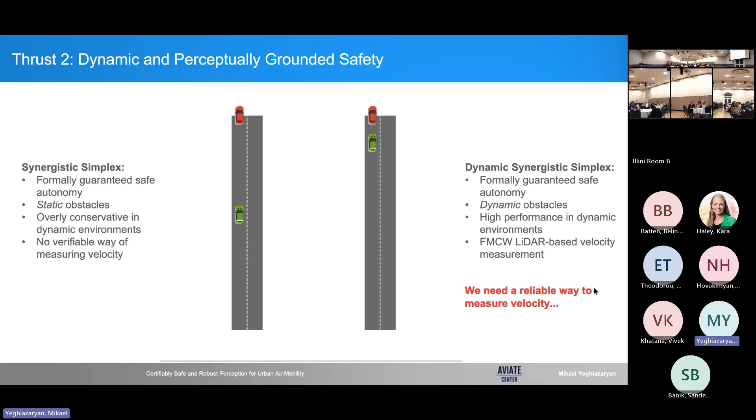Now, let's talk about thrust 3, where we aim to expand the set of verifiable components in the safety layer. We start with verifiable lane detection based on LiDAR to extend one of the current applications. This builds on a useful property of LiDAR, that it returns different intensity values for road surfaces and lane markings. Again, this is an example based on ground vehicles, something that we all know very well. But we also plan to integrate other verifiable components, such as HD maps and logic associated with HD maps, for example how to break the road into lanes without actually detecting lanes, simply by knowing the number of lanes on the road. This will further improve both safety and performance.

Now, in this slide, I want to describe an interesting way how we can extend the safety envelope of multi-simplex systems. It's not novel in mathematical terms, but it's quite interesting in the context of simplexes. On this slide, we have the ML faults shown in this Venn diagram, with the obstacle detection faults on the left, lane detection faults on the right, and cases where both fail in the middle.

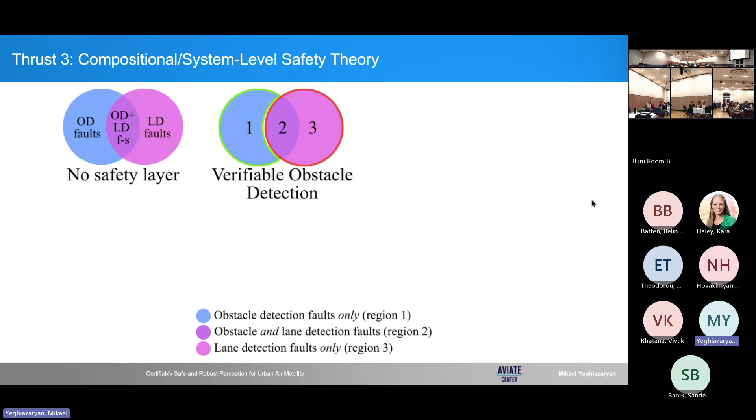Now, perception simplex covers region number 1, which is this region on the left, so we have safety guarantees for this region. If we develop verifiable lane detection, we're going to cover region number 3. At first, combining the two might seem to cover only these separate regions, but in fact, we'll also achieve coverage of the overlapping region, the case where both components fail. This kind of super additive property is what we aim to leverage to further extend the verifiable safety region of synergistic simplex.

And now I'd like to turn to the final thrust: the simulation infrastructure for realistic evaluation.

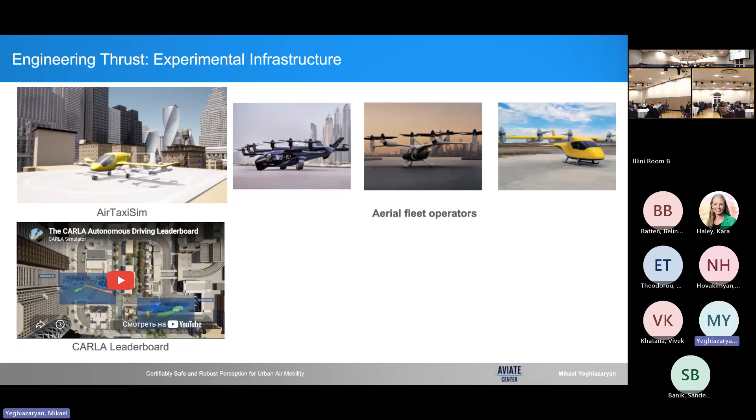Existing benchmarks such as Carla leaderboard and the air taxi sim developed on the ULI project are useful, but focus on short scenarios. They do not capture performance over hours of operation. Long horizon simulation would let us measure the practical cost of safety algorithms, such as reduced speed in real fleet operations. For companies like Archer, Joby, Wisk, Waymo, and Zoox, this reduction in speed, and therefore revenue, can be viewed as insurance for guaranteed safety.

To support this, we plan to build two Carla-based large-scale simulation platforms: one for ground vehicle fleets and one for aerial fleets, based on the air taxi sim that we developed. These platforms will help evaluate dynamic and filtered synergistic simplex in realistic operational settings, building on our ULI experience in simulator development.

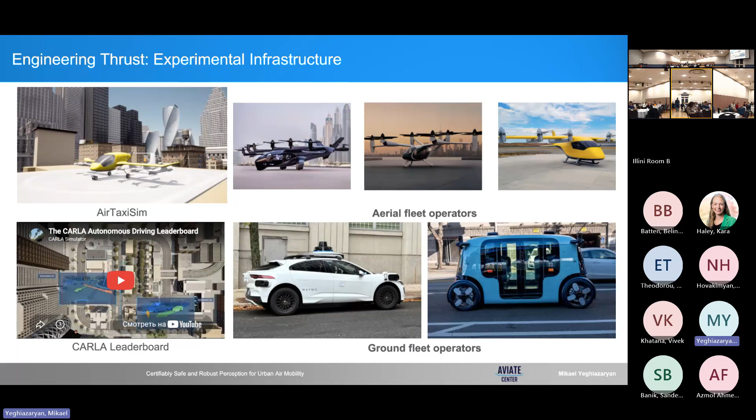This video illustrates what the autonomous ground vehicle fleet simulator could look like. While the CARLA leaderboard I just mentioned focuses on evaluating performance in specific short scenarios, our goal is to move beyond that into long horizon simulations.

Finally, I'd like to conclude by saying the ULI project has led to a lot of significant milestones, and the research directions we explored have also opened up several promising ideas that we are very excited to pursue, and that I've briefly touched on. Well, not too briefly, but I've touched on in this presentation. I'd like to thank you for the opportunity to present, and I'm happy to take questions.

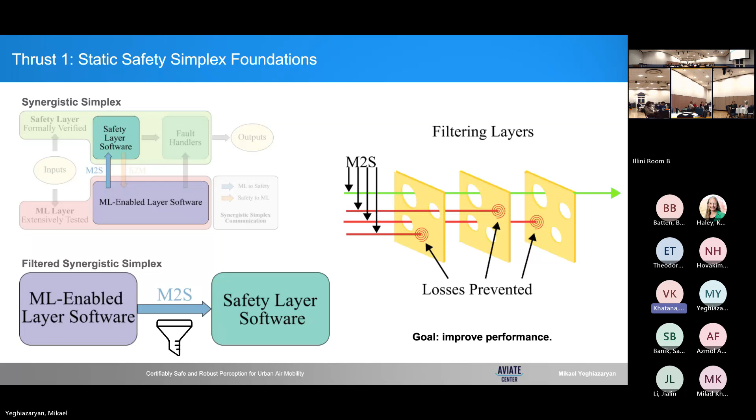So yes, I think it can. Easy answer, Mikael, is what you said before: an HD map. Those maps, like a moon or space map, are very useful. The moon is moving, but we know its trajectory, so it's not changing anytime soon. So with an HD map, the model can handle the constraints that are there.

But no, let's say somebody suddenly jumps in front of me on the street. So we have to use sensors. But even using the HD map, we also need to use something like GPS. Otherwise we cannot use the map. If there's no location information, then the map isn't useful because we don't know where we are.

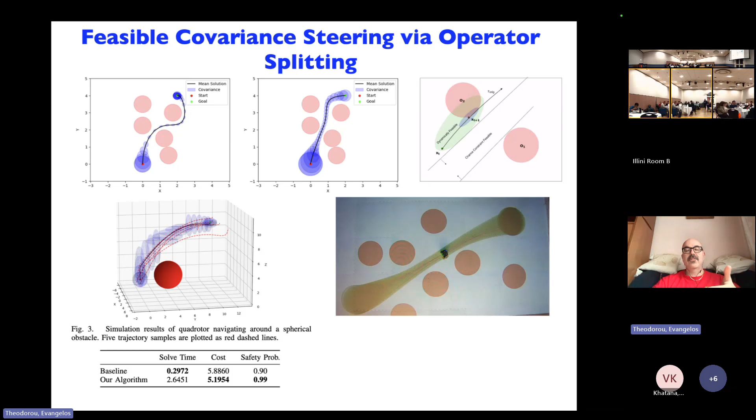And then there's the whole work we did with Christos on hardware. One lesson we learned from that hardware experiment—let me go back, this is the experiment—is that we had really limited computational capabilities on this vehicle, and we had to make approximations that allowed us to pull this demo forward.

There was a question before about vision. When it comes to hardware, I think universities would benefit quite a lot if this hardware were more available to them. Christos is an exception here—he's an exceptional researcher in building hardware—but it's difficult to build hardware without knowing what demos you want to pull forward. Ideally it would be great to have a GPU on this vehicle and do all the things we've done on terrestrial vehicles, but given the resources we had, this is the demo we were able to pull forward. The bottleneck in university research is typically the availability of hardware and the resources we have to build it.

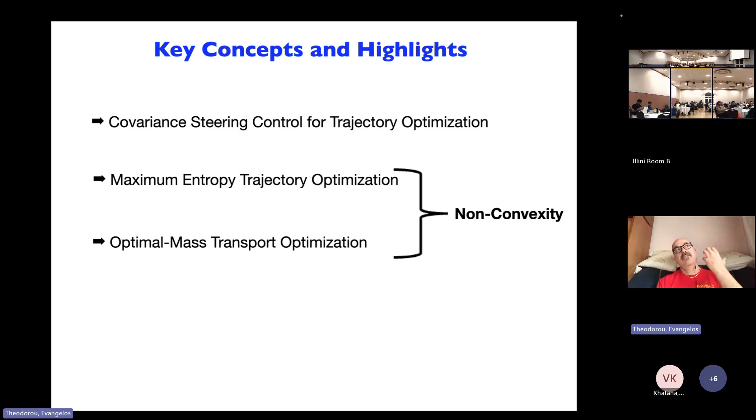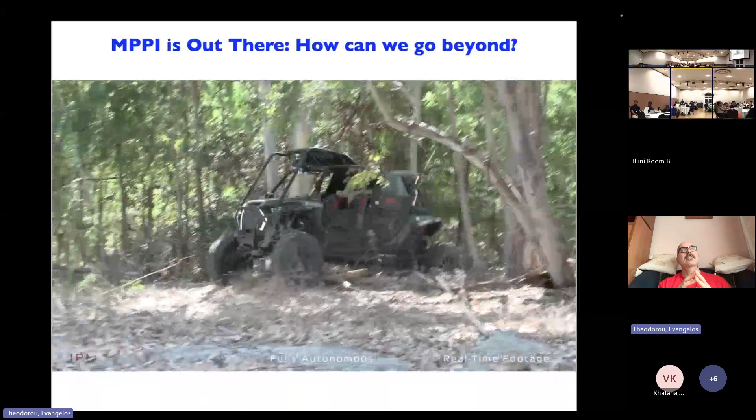Now I'm going to go to things that excite me a lot, which we did for this particular project. In my lab we've developed stochastic optimization algorithms, motivated by the need to handle the full nonlinear dynamics and the full non-convexity and non-smoothness of the optimization problem. Some of these methodologies are now very mature. Here I'm showing a video from a project we did with JPL on an off-road navigation platform, where we used stochastic optimization algorithms like MPPI to handle all the nonlinear dynamics.